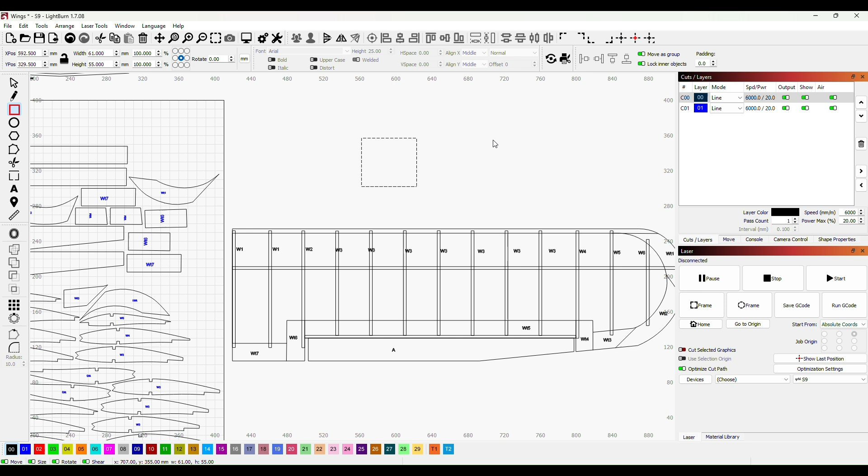So the first thing we're going to do is create an insert for the servos. I've measured the servo up, and I'm going to start with creating the space that the servo will sit into, and I'll do that by making a box that is going to be 22.5 by 22.5, and then building on that I'm going to create another box which is going to be 11mm wide, and then that box is going to overlap onto our main body of our servo there.

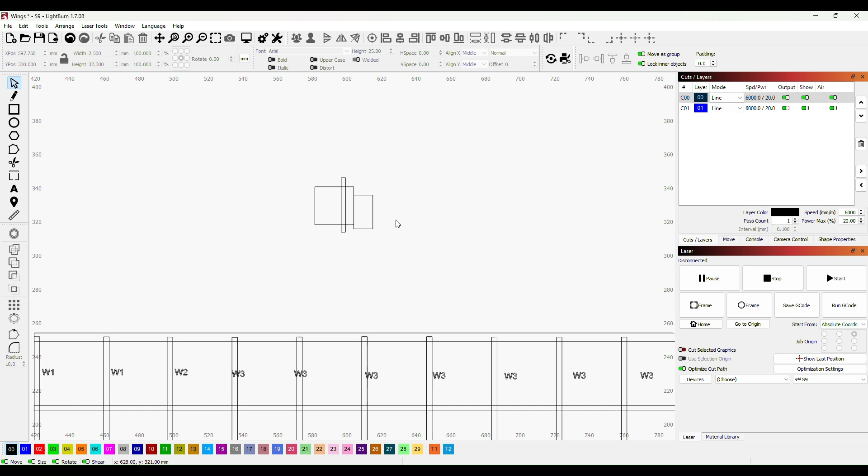Okay, so the lugs that hold the servo in, I'll make another box for those, and they are 2.5mm wide by 32.3mm high, and then that box sits right here, and the distance there is 18.1mm from this back edge to the front edge of those lugs there.

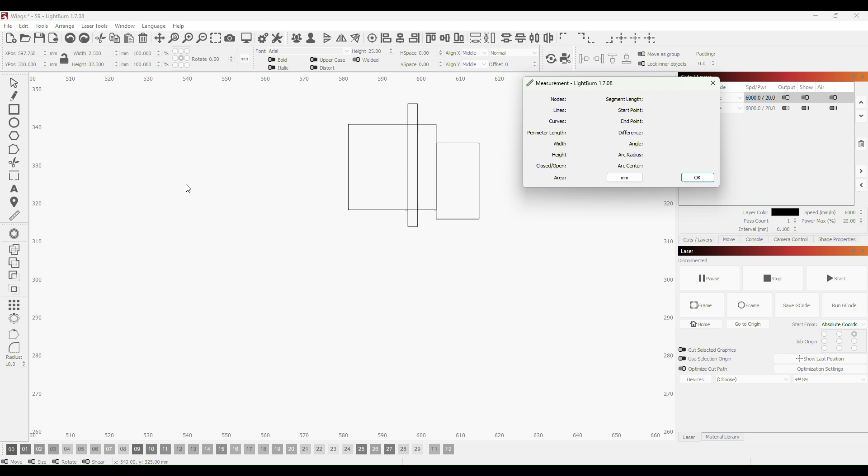So I'm going to just measure that. It needs to be 18.1mm. So if I come along there and measure to there, that is 17.75. So I want to go 0.4 of a millimeter. That'll give us a little bit of clearance.

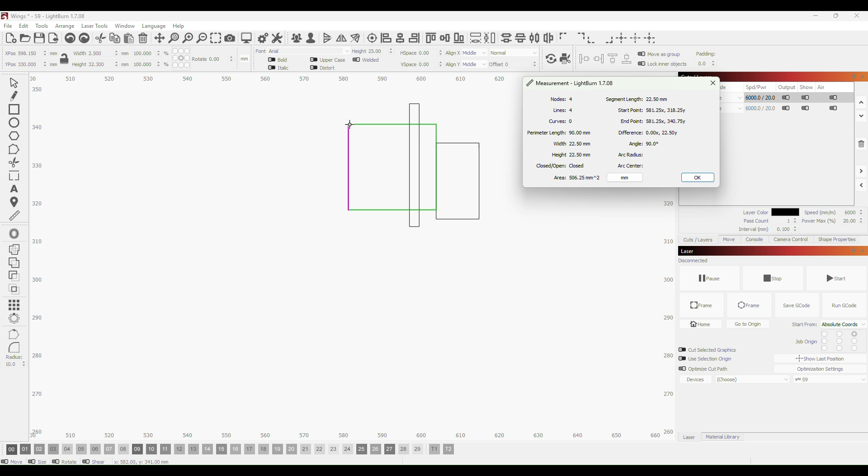So all I'm going to do is click on the shape that's going to form the lugs. I'm going to press Control and Shift and move along 0.4, 1, 2, 3, 4, because if you press Control and Shift and then your arrow buttons, you'll move 0.1 of a millimeter. So I'll just remeasure to make sure that we're more or less where we want to be. So that's 18.15, so I'm quite happy with that.

Now, one of the tips that somebody gave the other day was that I now want to center this. So if I select this shape and then press Control and select that shape, so I've got both of these shapes, and then I go to this button up here, press that, just like that.

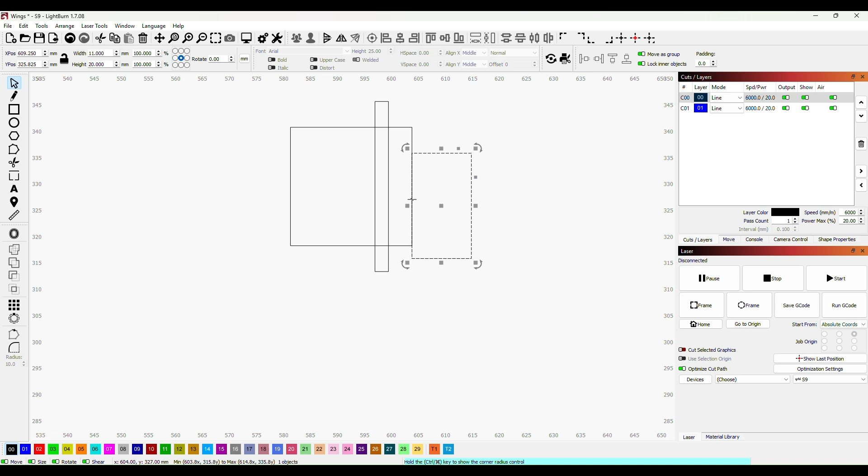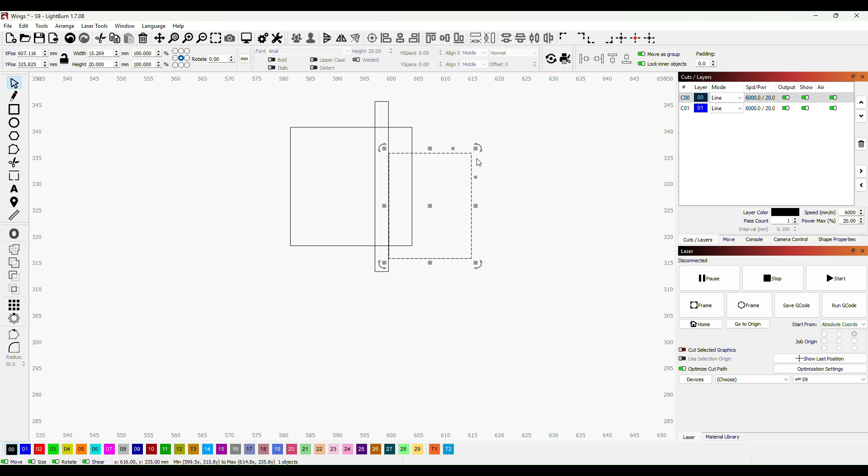So next thing I want to do is take this and bring that down so that it reaches our lug. Now the reason for this slot here is the lever on the servo is going to operate in this area, so that needs to be cut out as well, and it needs to come all the way down to our lug there, just to make a sensible shape.

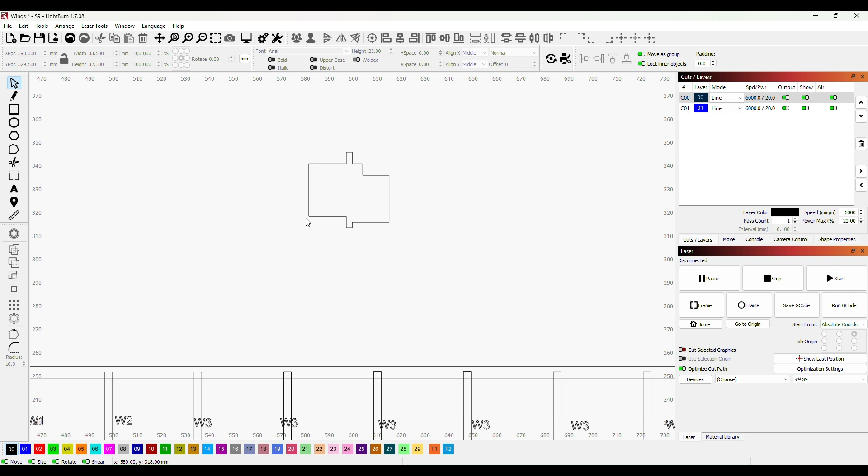So all I'm going to do now is select all of those and then come down to our weld function here, click on that, and we've now got the appropriate cutout shape for the servo to sit in, and then the operating area for the arm.

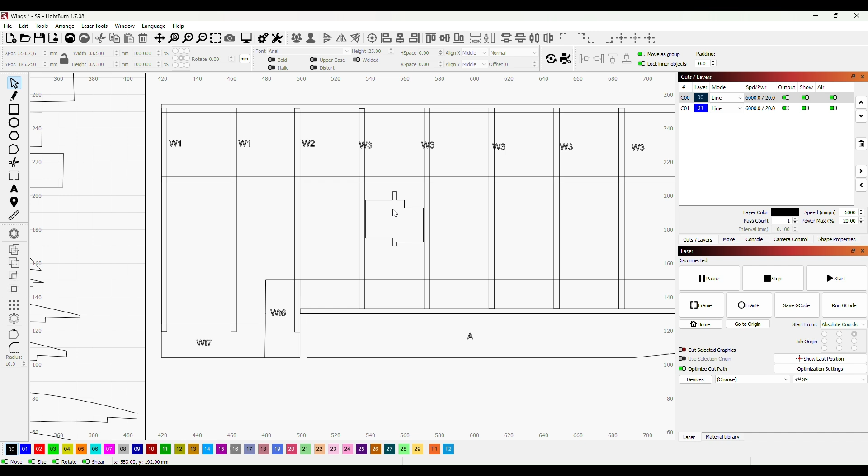And now what I'm going to do is drop this into there, because I want to form two pieces, one to go above and one to go below, and the reason for those will be they'll be inserts of 1/8 balsa, and the servo will be able to sit inside those and then operate underneath the wing.

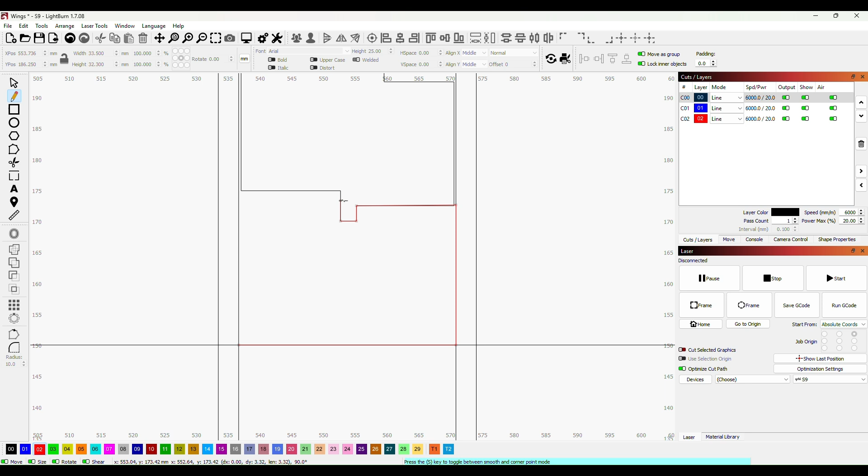So to create these shapes, all I'm going to do is use the line tool. I'm going to zoom right in, and I'll make this a different colour so that we can see it, and all I'm going to do is go from this corner to this corner to there, across, just following this shape, and then scroll all the way down and snap that onto that, and that's the shape for our bottom piece of balsa.

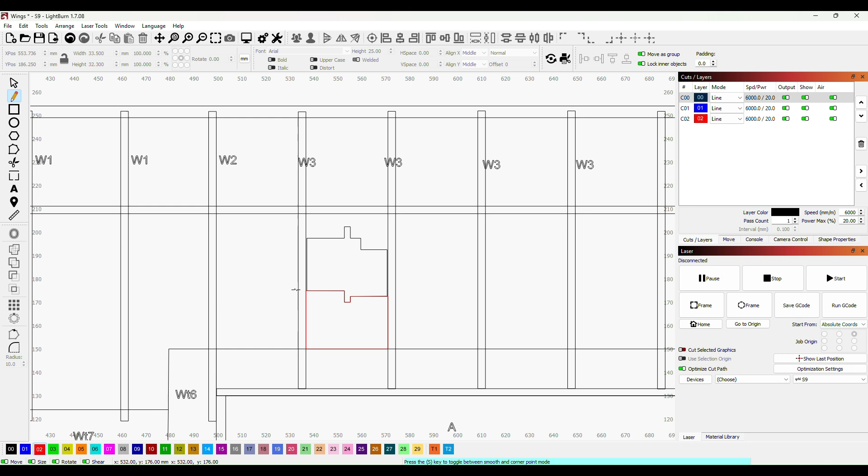Now I'm going to do exactly the same at the top. Perfect. So I'll be able to put those two pieces of balsa in now, and we'll be left with an aperture for our servo. So I'll just bring those out.

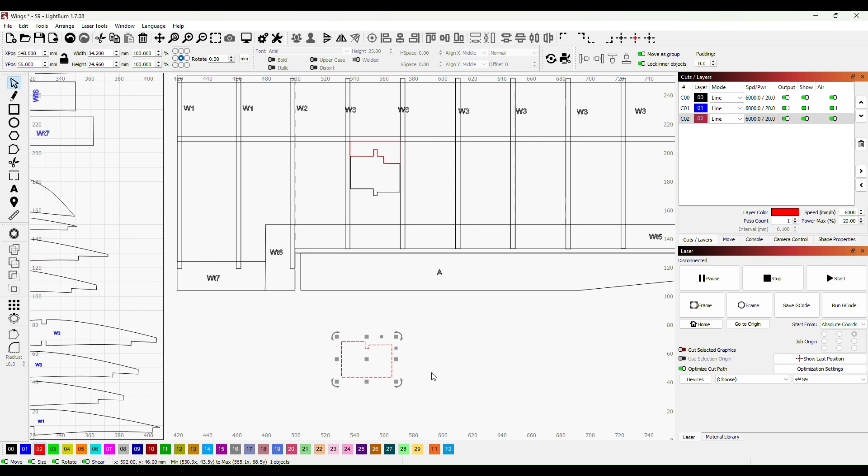And that was only there as a pattern, so we don't actually need that now. But what I'm going to call these is WS1, which is wing servo 1, and WS2, wing servo 2. Let's make those our engraving layer.

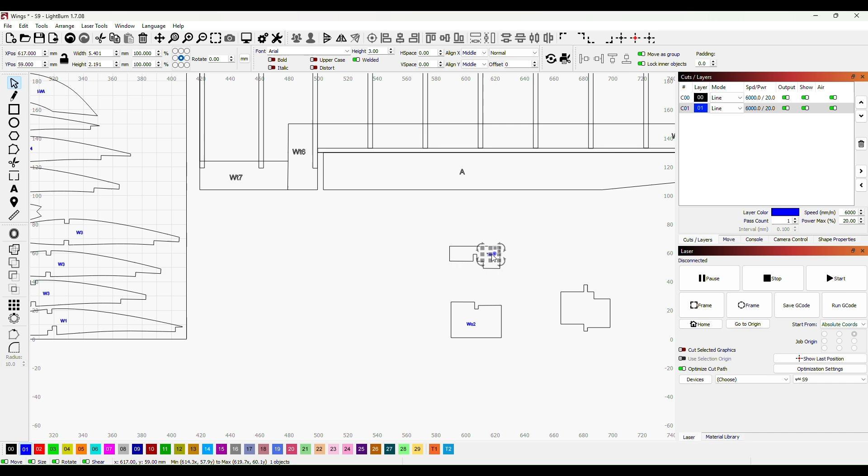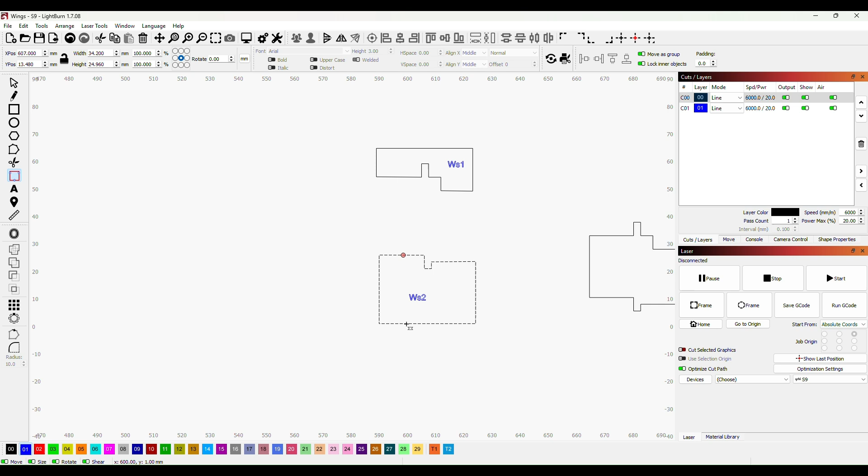Move that to a bit where it's more central. And then I'm going to add a couple of little tabs just to make sure that they stay in place when we are ready to cut them out, or when we use the laser to cut them out. I don't want them to fall out of the sheet. Okay, so if I just Ctrl+C and Ctrl+V, I can add those straight in. I'll put them into a sensible place up here. Okay, so that's those.

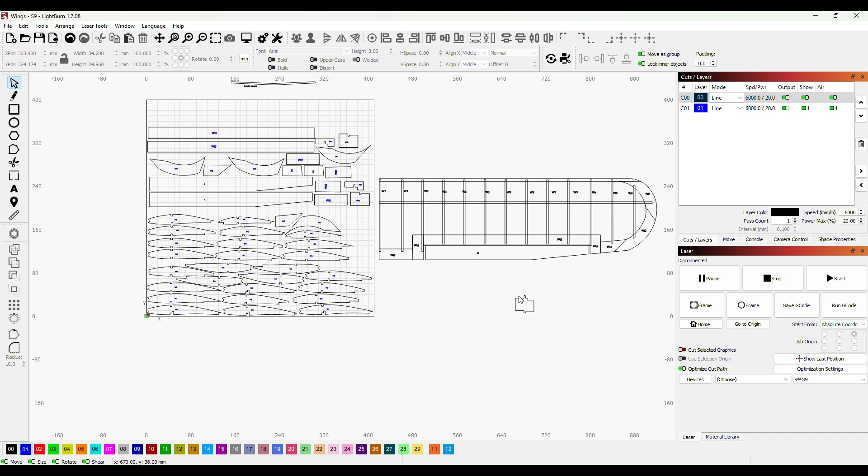Next thing we need to do is work out where we're going to put the horn. So if that is our servo sitting there, then the operating handle or the operating lever is going to be just there. If I just put a line on there for now, it's going to come through, so our horn needs to be cut in just on this line here.

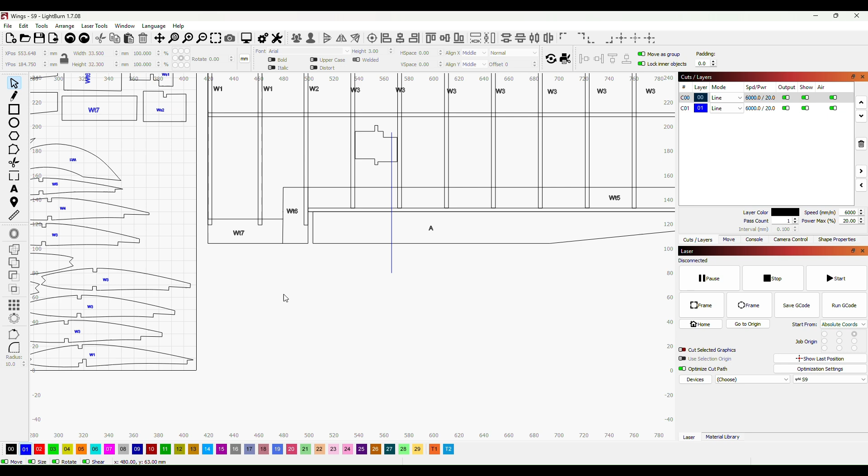Now what we'll do is we'll make the horns from 16th ply, and I want them to be more or less the same height as the lever on the servo. So the lever on the servo from the center where it rotates is 15 millimeters. The way I'm going to do that is there'll be a little piece which fits into a slot in the aileron, and then the horn will protrude from there.

So to do this, I'm going to make a small shape 3.2 millimeters wide, and I'm going to make it 8mm long or 8mm high. So then, because our lever on the servo is 15mm, I'm going to now make another box, and this is going to be 15mm wide by 10mm high.

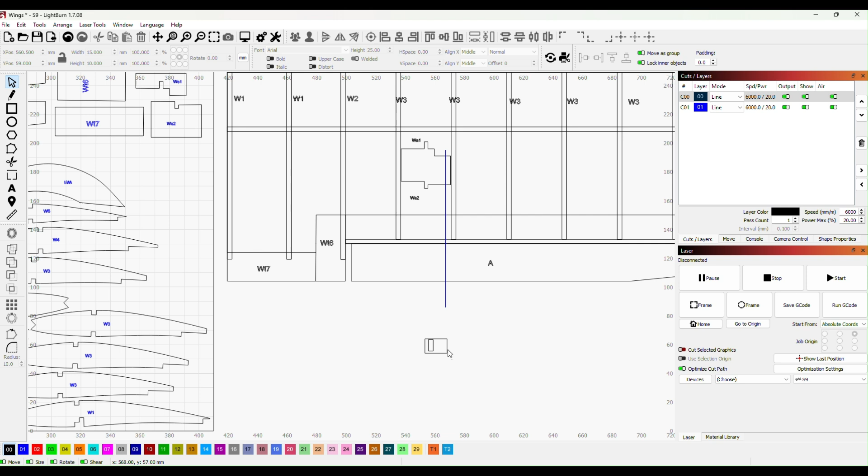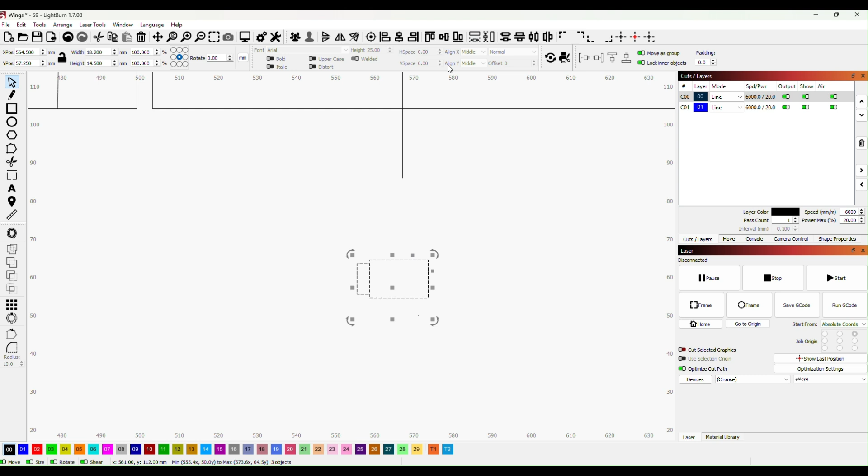So if I bring this shape until it snaps onto the other shape. Now by highlighting them both, I can center them both using the centering tool, and then from there what I can do is select this and we'll use our snipping tool to take away those pieces.

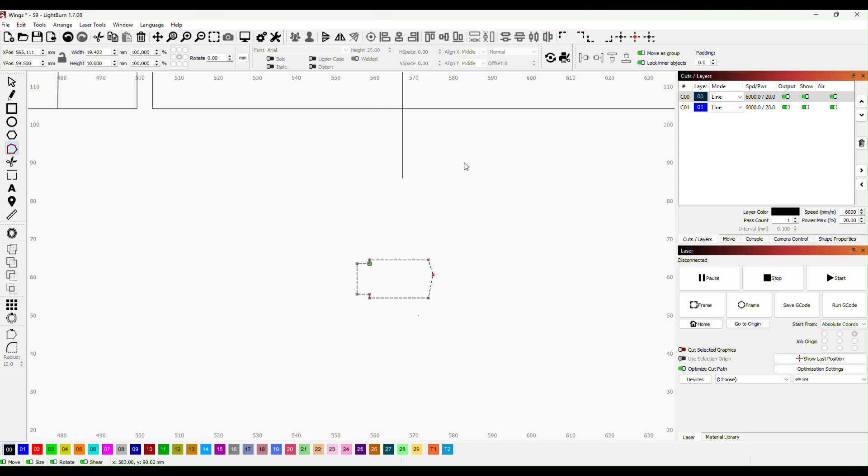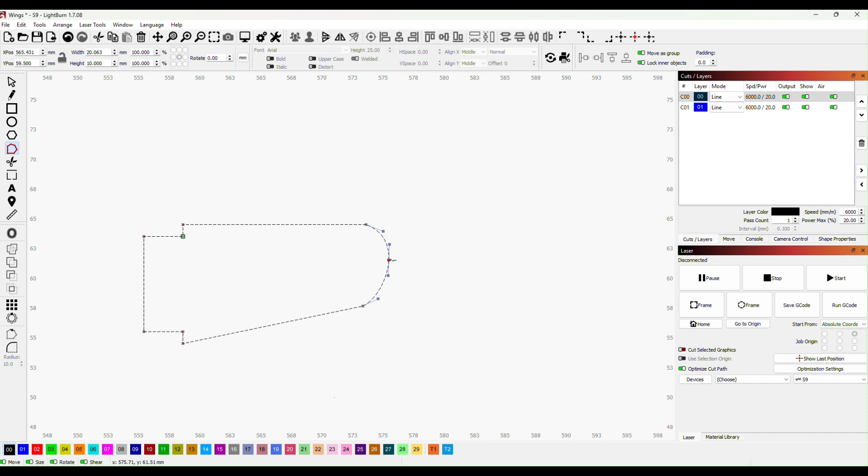Now if we go to nodes, all I want to do is add a node to this end by hovering over the line and pressing I. That inserts a node, and then I want to bring this node right in like that. Then by converting this center node to a smooth curve node, hover over it, press S, and then using the corner nodes and the smooth curve nodes in the center, I just want to smooth that out a little, just like that. And then when we look at our shape, we've now made a horn.

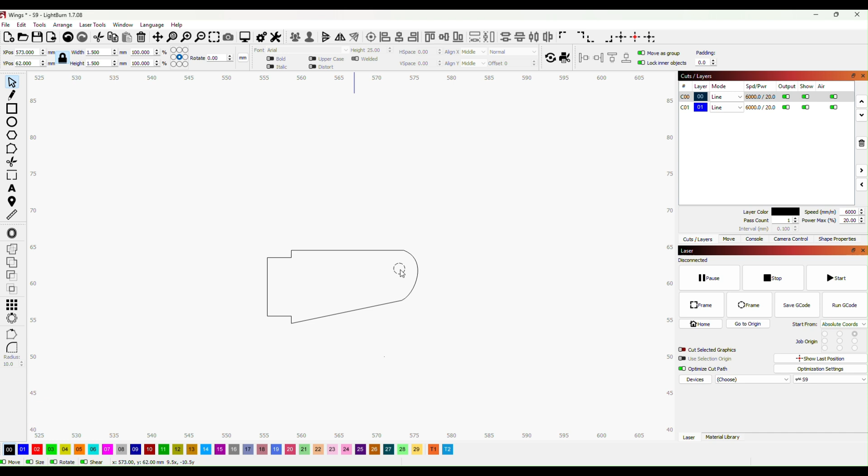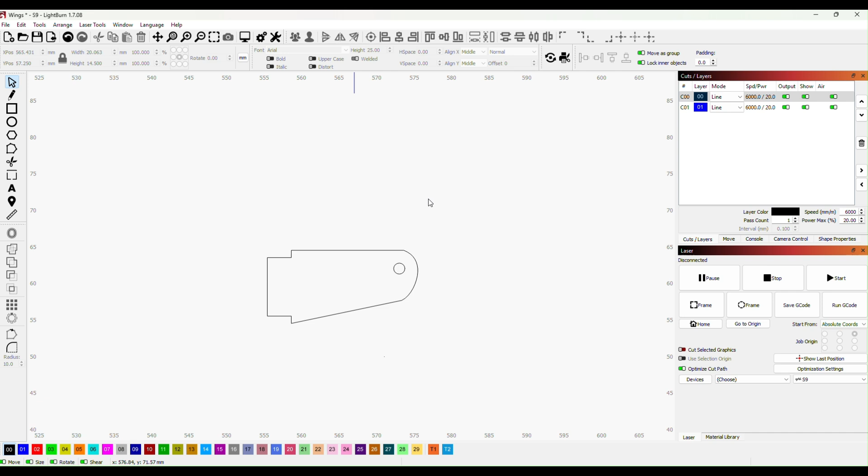So all I want to do now is make a small circle, and that just wants to be around 1.5mm, and then we can take that shape, put it where it looks about right on our horn, which is just higher than center, and then if we group those, that's our horn made. Now we'll cut these out of 1.5mm plywood. So on our aileron we're going to need to cut a 1.5mm slot.

So if I create a little shape like that, I know that that's going to be the right size for our horn on the aileron, and leave the height exactly as it is.

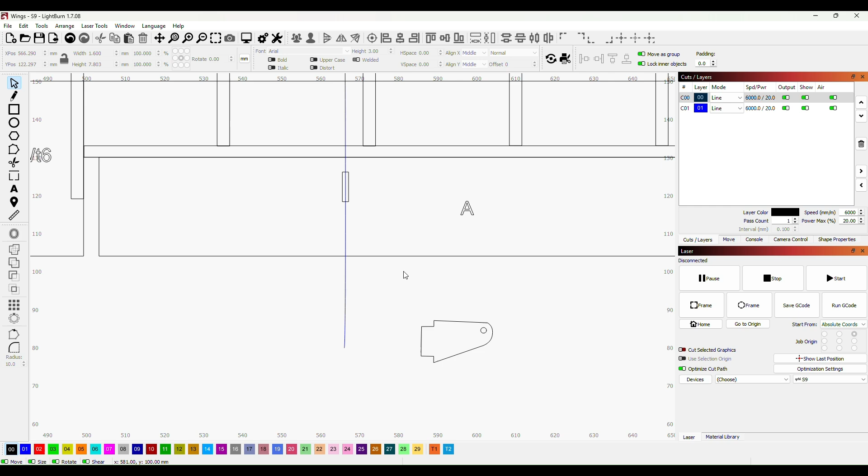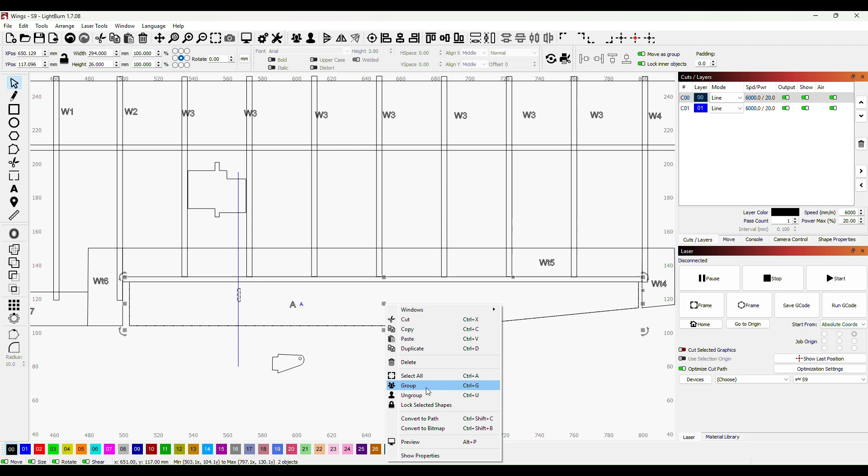Now we've already put our ailerons up here, so what I'm going to do is bring one down, superimpose on there, just like that, and then I'm going to control and grab the slot for the horn, and then right click and group. So when I bring our aileron away, it's now got the slot for the horn.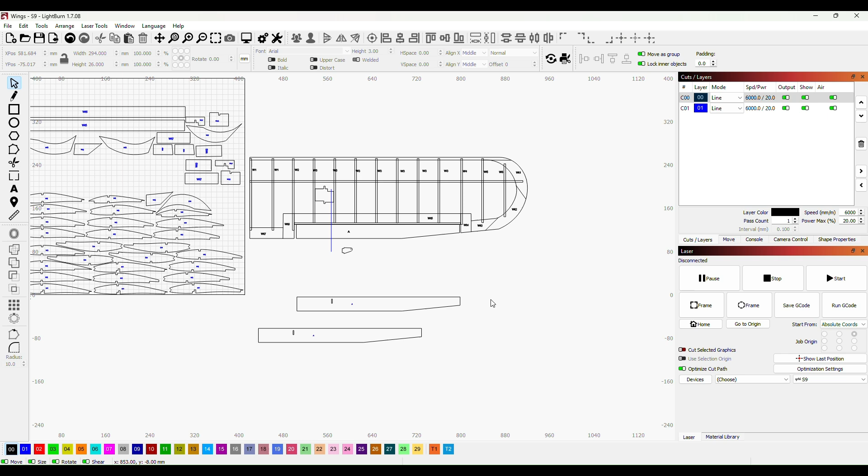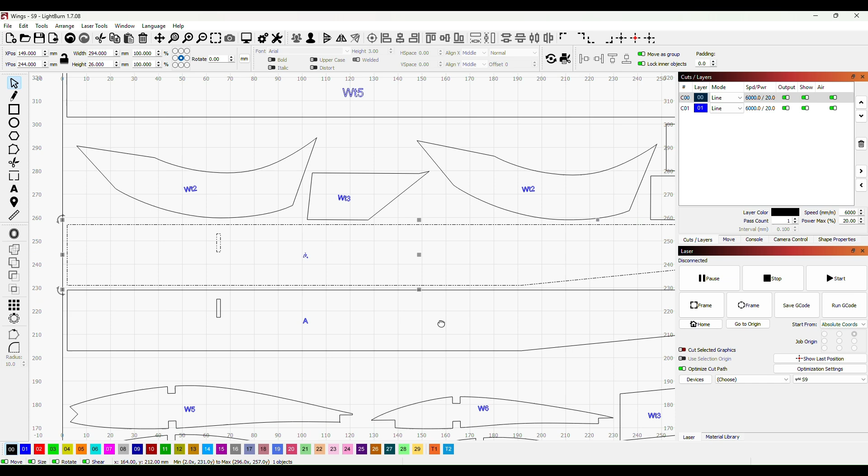So rather than do that exercise twice, I'll delete that one, and then I will copy and paste and I'll just put them back. Bearing in mind we don't want to be on that 200mm line, so I've got to keep away from that. And then this one. Make sure we're not hitting anything. No, all good. So that's the slots for our horns.

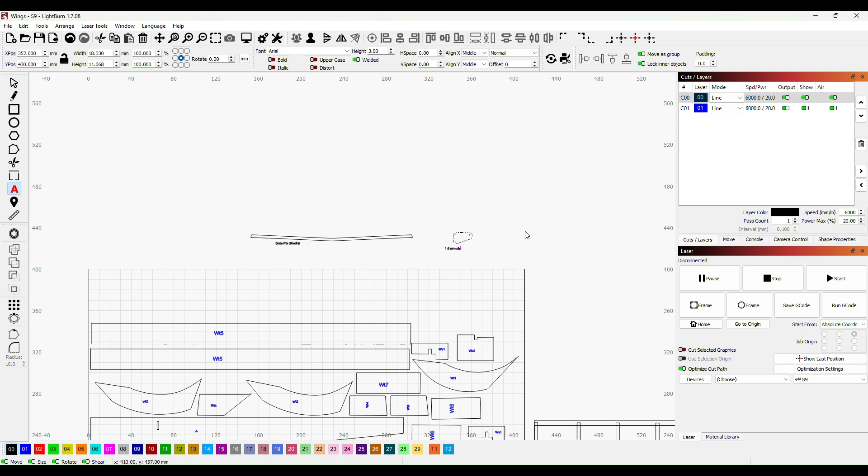I've produced the horn, and we'll put that up here with the spar, and I'll just label underneath it what that has to be. So that is going to be 1.6 millimeter ply. That's just to remind us really, so I'll group those for now.

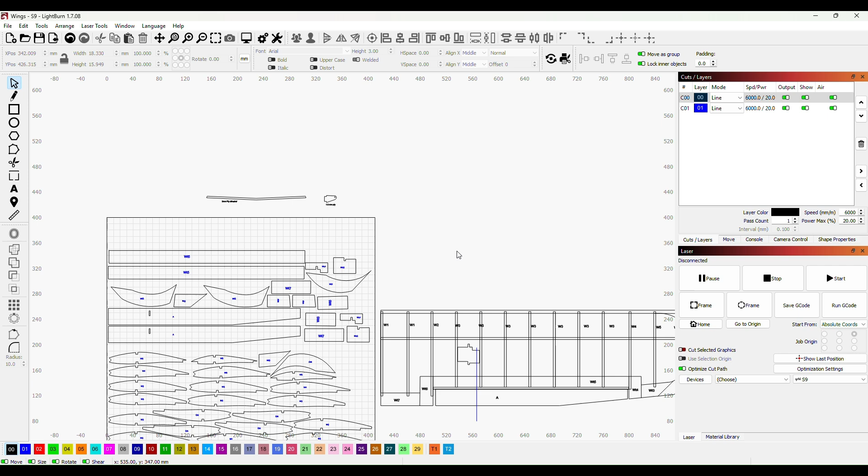We'll need 2 of them for the wing, but we're also going to need 1 for the rudder and 1 for the elevator when we get to doing those. I'll leave that, in fact, because that can be part of the plan. So with that in mind, I need to label up WA2 and WA1.

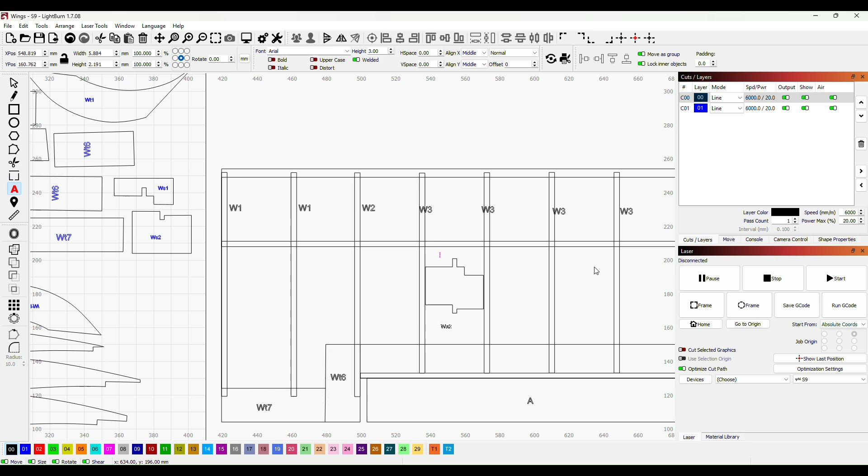So the last thing that we need to do is allow for the cable that operates the servo to come through these ribs and then drop down in between the 2 W1s there. What I'm going to do is I'm going to put them in on the bottom of the rib, and then I'm going to shield it with a piece of 1/16 balsa. What it will do is it will just shield the cable, and then I'll put a hole in that piece of balsa just there.

So with that in mind, I'm just going to create a shape here, and all I want is for that shape to be exactly that length, but I want it to be 20 millimeters high. Just take one of these W1s from here, and I'll just turn that up, and our cable will just be there, and this piece of balsa will just sit in there.

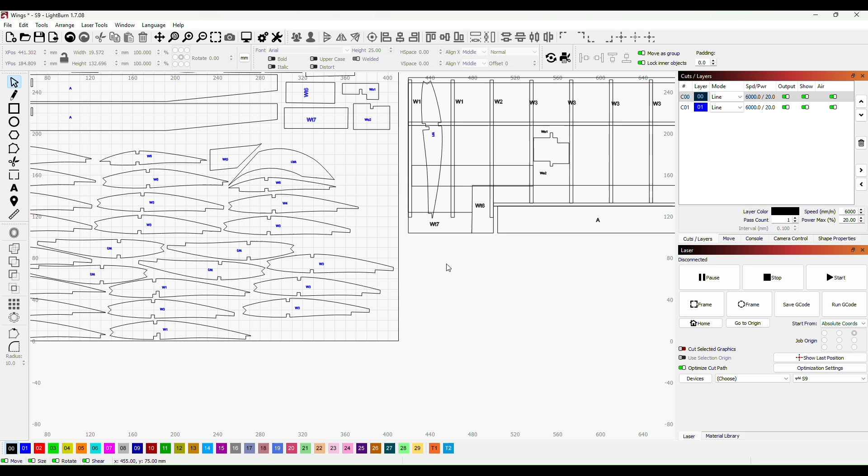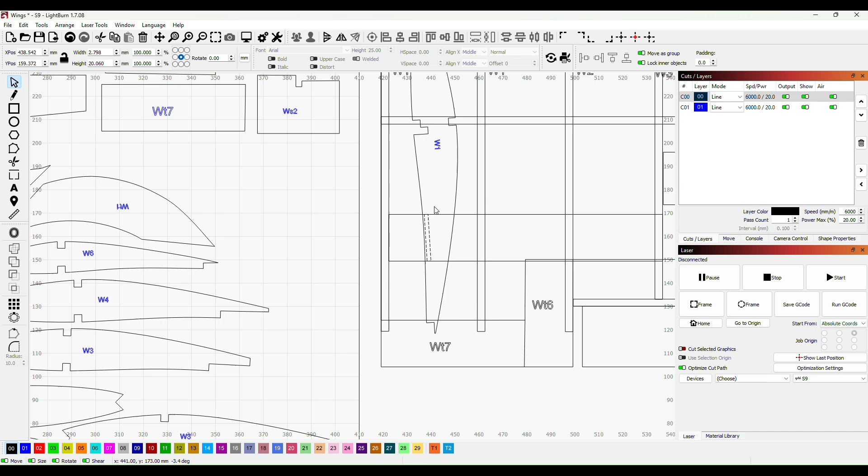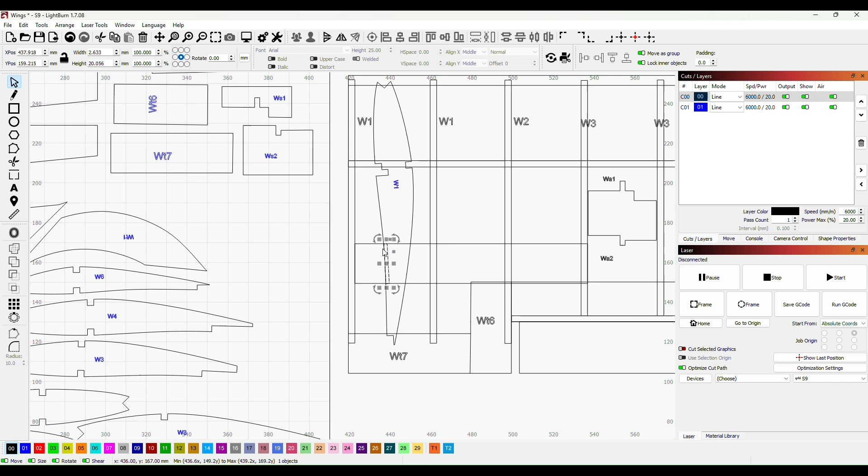So with that in mind, what I'm going to do, create a shape once again, and I'm going to make it that size, and it's going to be 1.6 millimeters wide. So that's how wide that will be. Now what I'll need to do is I'll just need to turn that slightly, and then we'll bring that line to just snap onto that one, because what I'm going to do is I'm going to cut a small slot in the bottom of the rib to accommodate this balsa so it's nice and smooth.

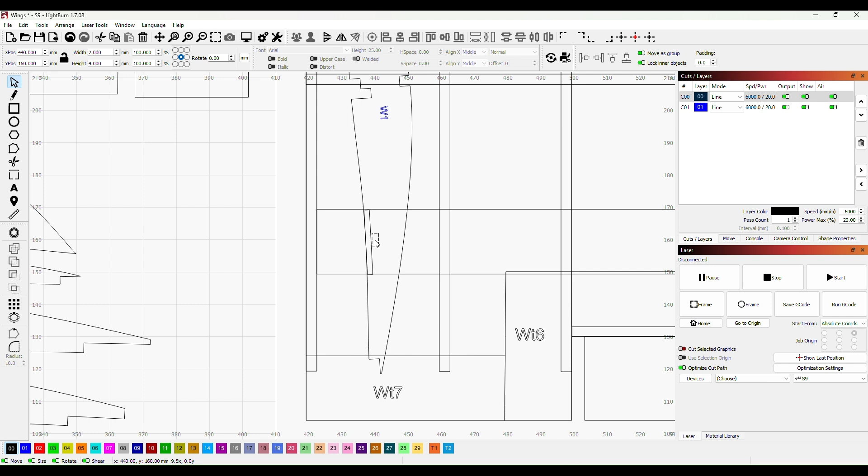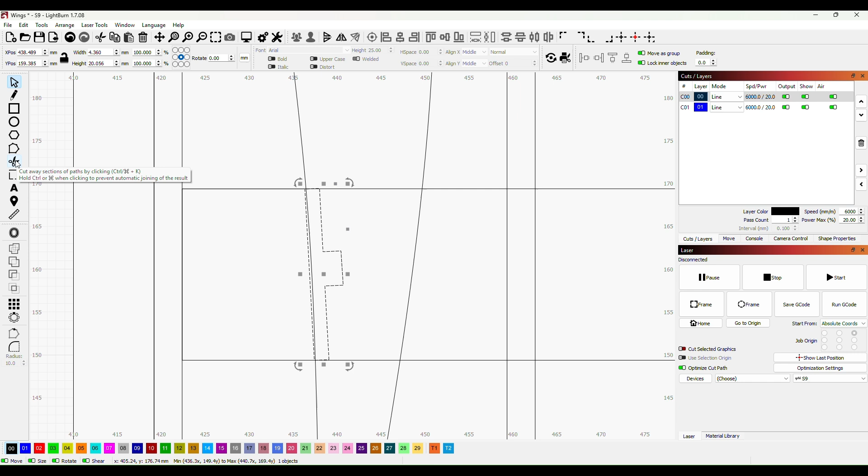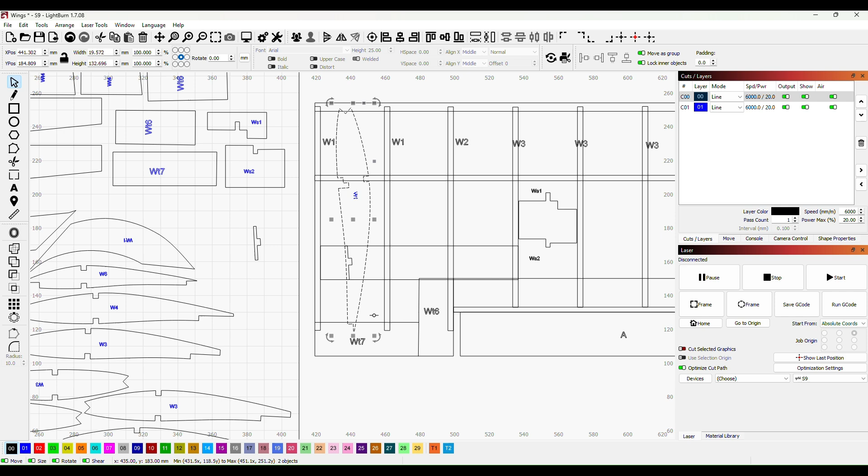Okay, and then on top of that, in order to accommodate the cable, I'm going to produce another shape, and that shape is going to be 4 millimeters high by 2 millimeters wide, and that will fully accommodate the cable for the servo. And then if I just put that on top of this, there we go, and that will be our shape. So if I just overlap those, what I can do is I can weld those together, and then if we just go to our snipping tool, we can just snip that away, and then again we can just snip that piece away.

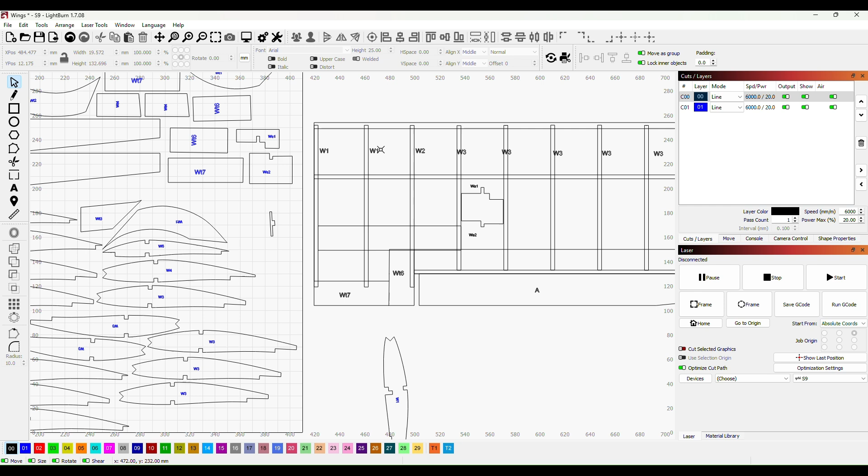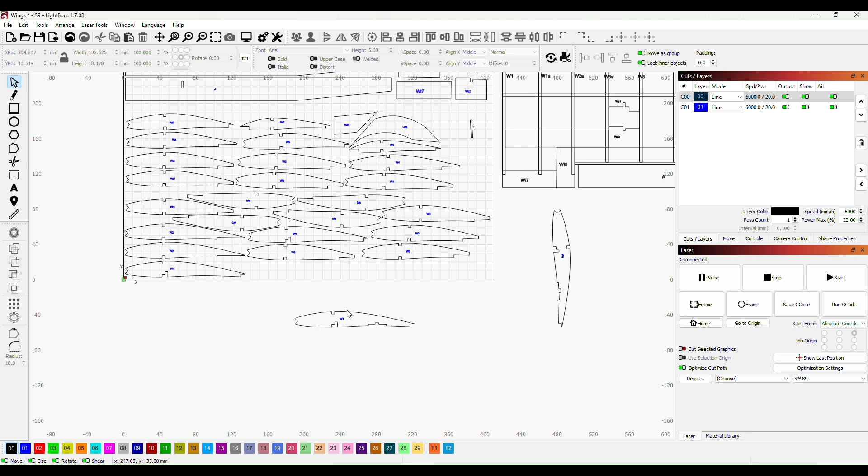We have now got the shape that we would need to accommodate this piece of balsa with the cable sitting nicely underneath. So what I'm going to do is I'm going to alter this, and I'm going to call it W1A. So I'll make a copy of that, because what I'm going to have to do now, and maybe we should have done this earlier before we did all this, I'm going to have to replace one of those W1s with the new W1A. There we go.

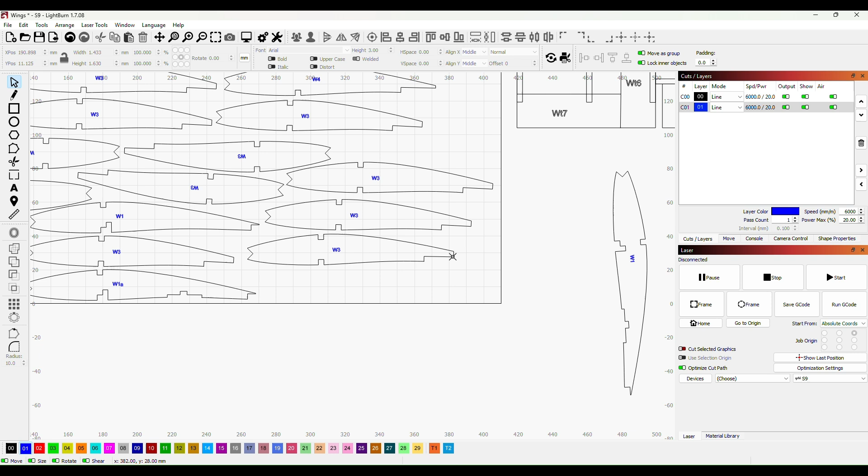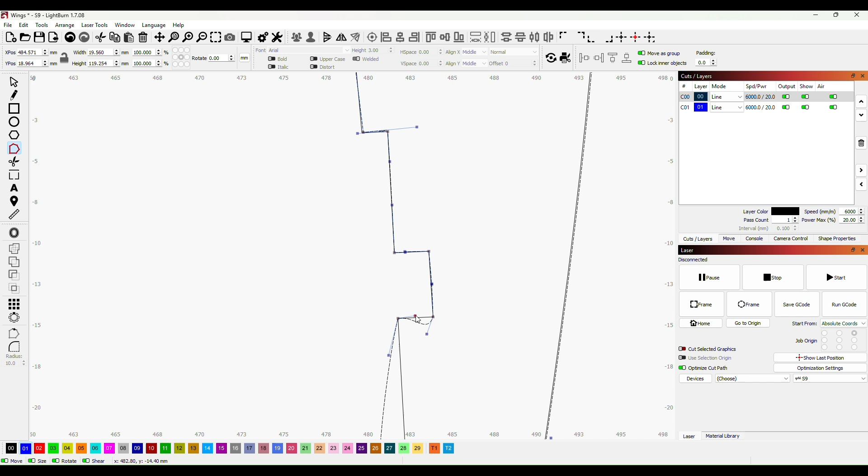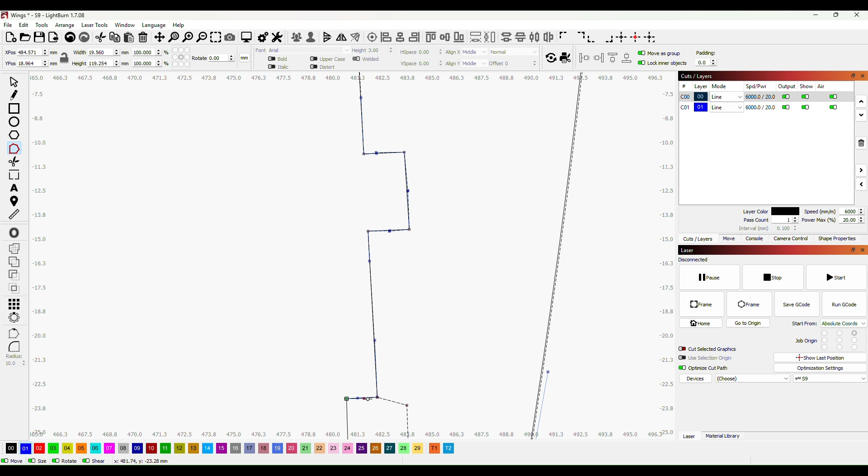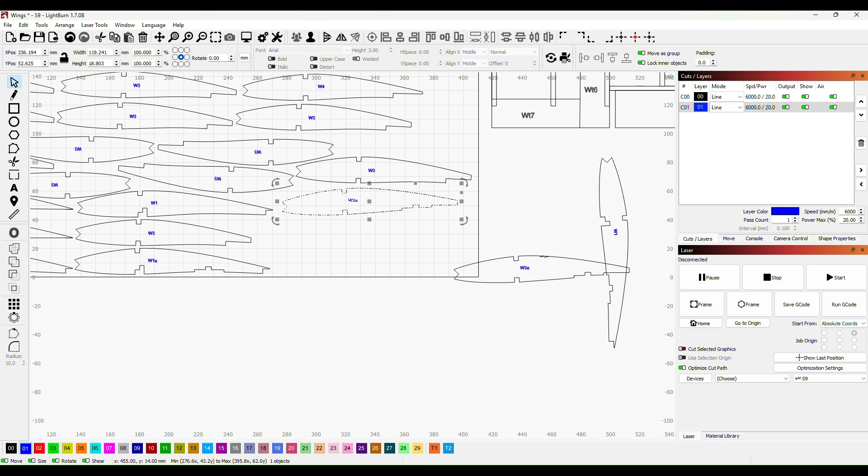Okay, so we need a couple of W3s to be exactly the same, so I'll just bring those over. Just bring one of those over and I'll just lift that up and superimpose onto our, and all I'm going to do is, using nodes, I'm going to copy that, and when we finish we've got this. This is going to be W3A. There we go. So if I just group, and then Control C, Control V, I've now got two of those, so I can remove one of the W3s and replace that with a W3A. I've got my other W3A to go in there as well.

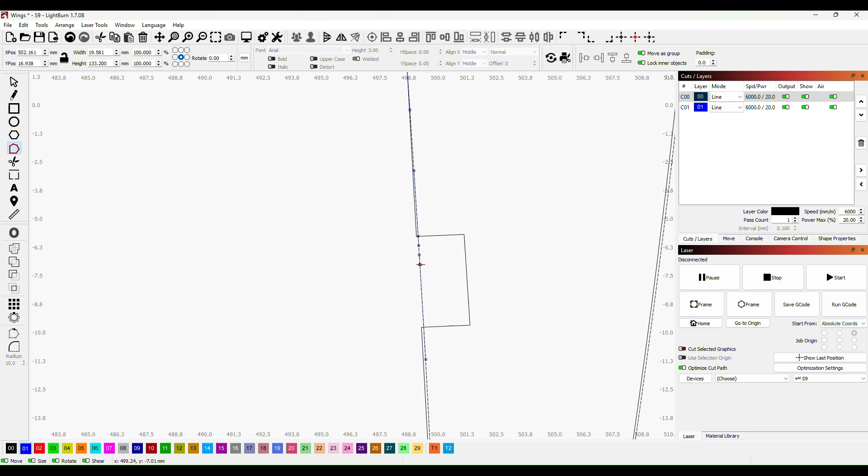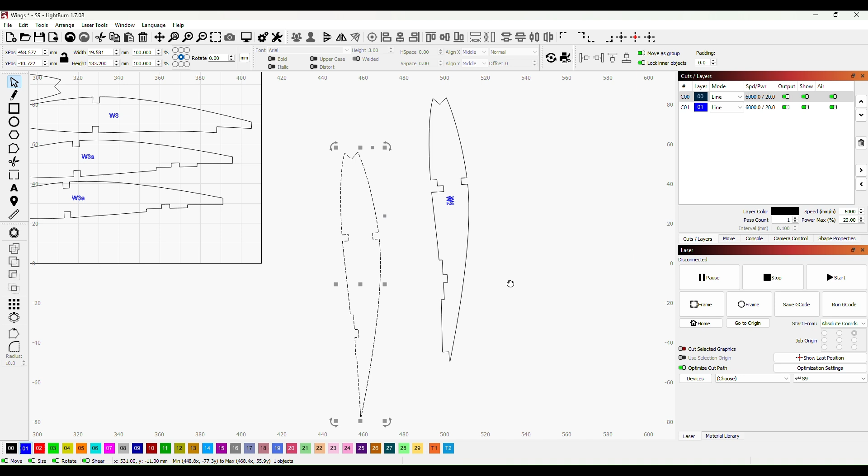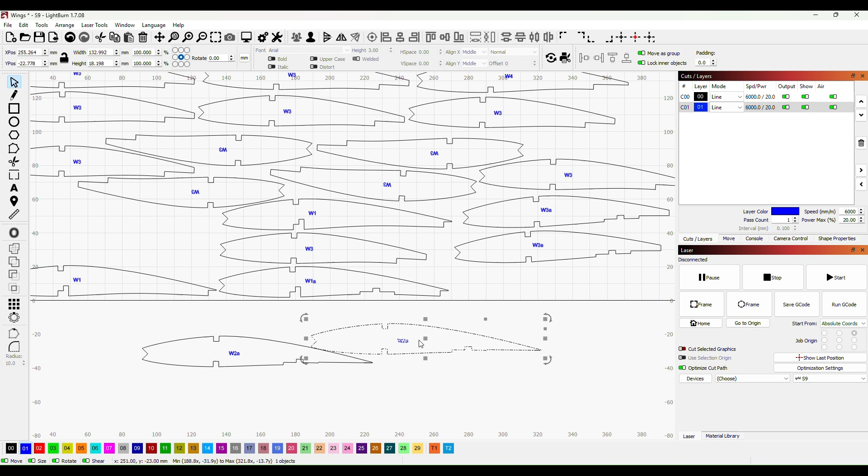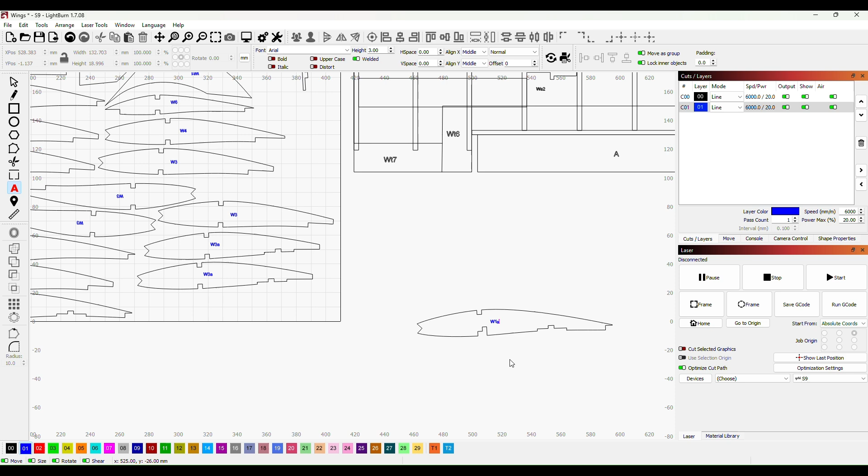And now all I need to do is alter a W2. So just name that up, W2A. And what we'll find now is we've now got another W2 in there, so we just remove that, and then make a copy of this. And then we can put those back into our pattern or back into our cutting plan. Just like that. Just put an A in there so we don't get confused at any time. There we go. Let's group that.

And I think we're now more or less complete. All we need to do now is make sure that we've got a place for our cable to come out of in our sheet of 1/16 balsa. So what I'm going to do is make a small shape. I'm going to put that there. Just change that to a cutting. And so the cable will run between the wing rib and this sheet of 1/16 balsa, which will be fastened underneath, and it will run through there, protected by the balsa and protected by the rib above, and then it will drop down into the fuselage there. So that's the plan for that.

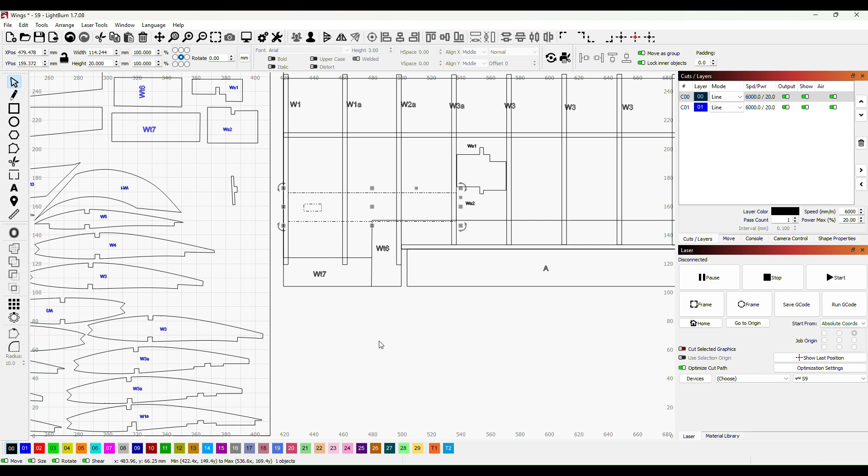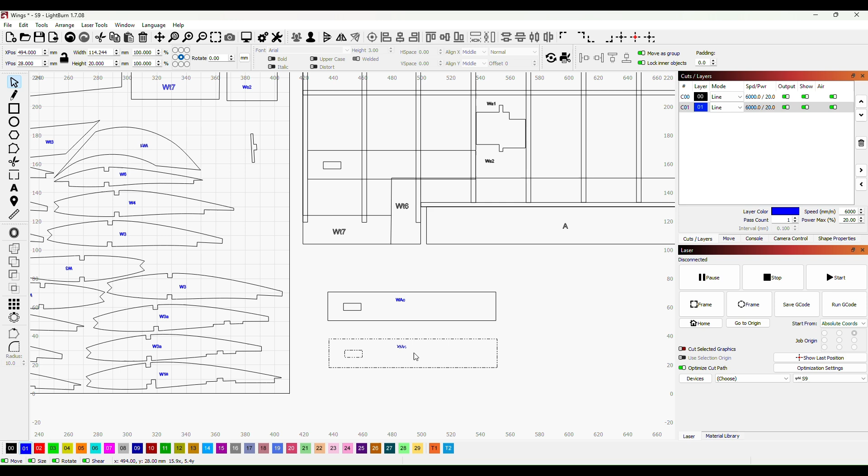So the next thing I need to do is to just group this. Group, and then make a copy of this down here, because we'll need to cut these out, and I'll call it WAC to be fair, wing aileron cable protector. Okay, and that just needs to be on our engraving layer. So we group, and then copy, and then V. So I'll put those onto a sheet where we're cutting 1/16 balsa, and we've now reached the point where our servo will fit in neatly there, and then the cable will run through the ribs and drop down into the fuselage there, and it'll be fully protected by a 1/16 sheet at the bottom.

Now we may have been able to do this in a different order. We might have cut these in while we were doing the ribs in the first place, but we've done them in this sequence just to keep everything straightforward, dealing with one thing at a time. So that's all there is for today. Next I'll be looking at designing and making the fuselage with a few simple rules that we can easily follow.